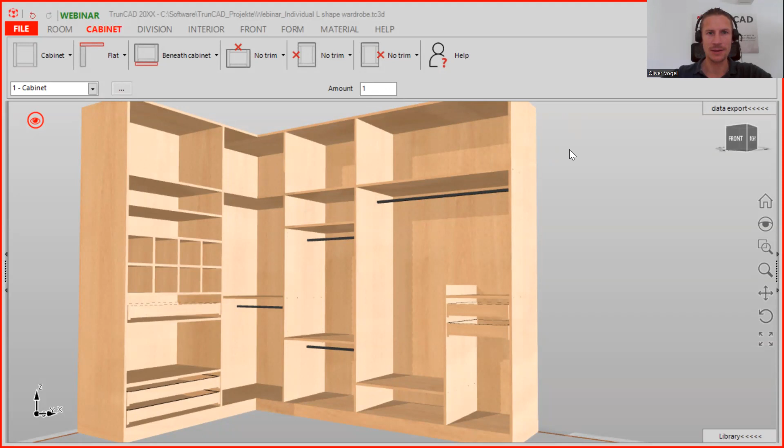Today you're going to see how to plan in TrunCAD an L-shaped wardrobe like this. You will see how to make the division, how to shorten a panel. Step by step we will go through it, and when there are any questions, just let me know in the chat. I will always keep an eye on it.

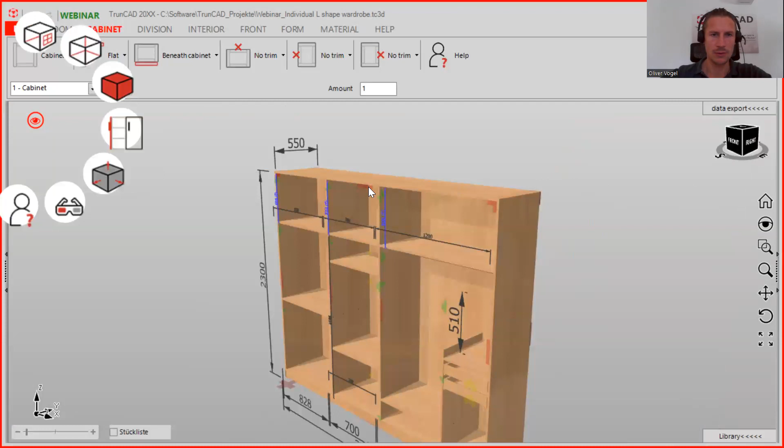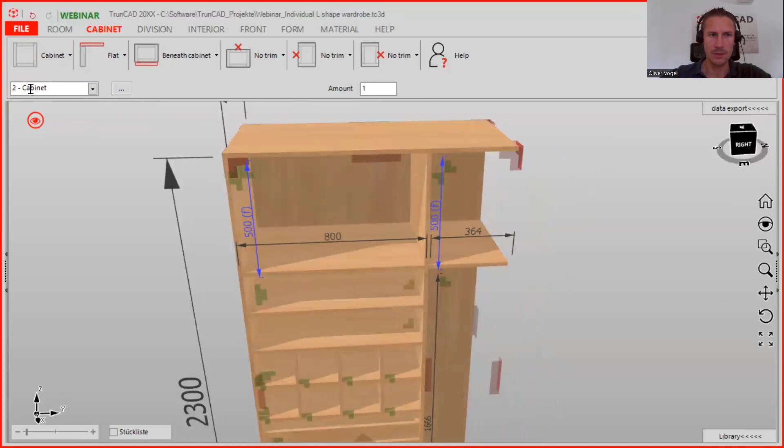And then let's start. First of all, we click here on a red eye and we activate the smart clicks. You see this L-shaped wardrobe has two cabinets. We can here also draw the room, and we can turn everything off except the activated cabinet. That is our first one, and here that is our second one. I will also show you how to set up the second cabinet so that it's perfectly fitting into the first one here.

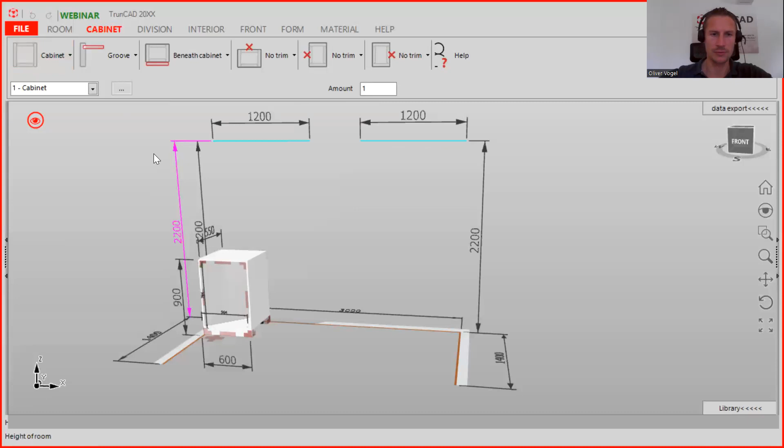All right, then let's start, and we click here on the File tab and start a new project. So first of all, it's important to make sure the room size is correct. Later on we are also able to change it. Here's the left wall, we don't mind it in this case. You see here I have a different default cabinet, so we can turn off the plinth legs, and here we want to have for the plinths also the back left and right part of it.

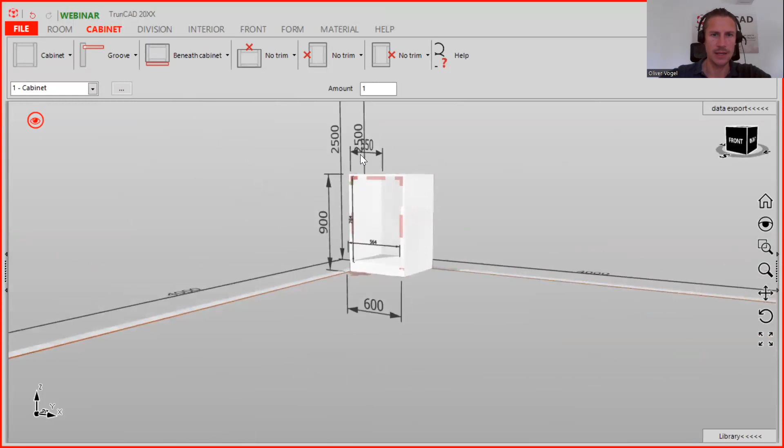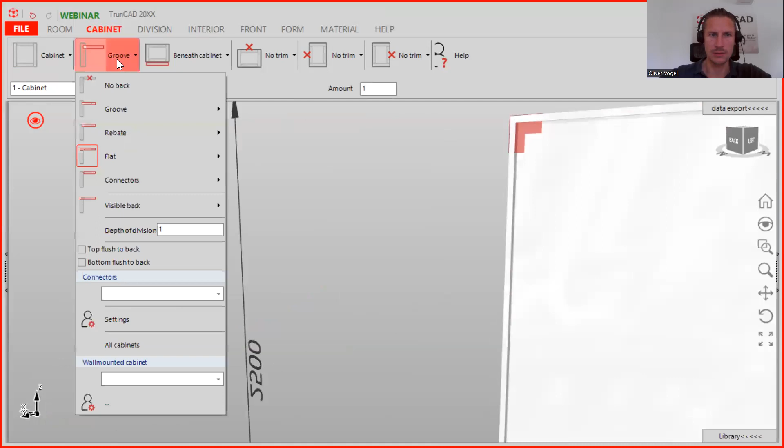Then it's already appeared, and then we start with measurements. The depth is all right. The height of the cabinet is 2300 millimeter, and the width of it is 2800 millimeter. So the back is not grooved, it's flat. And here you can also change the distance to the side. You can change it individually. So then we have it like this.

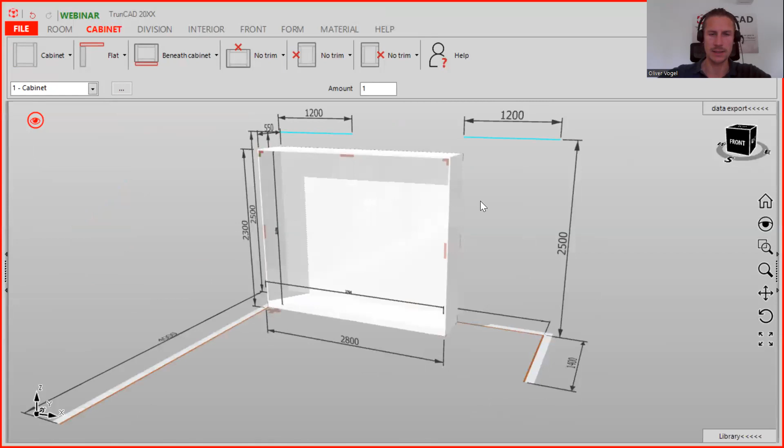And here in this case, at the beginning, I recommend to change here also the material. I activate here all parts of the group. The verticals and horizontals is the group part, the back is one, and you see here also for the plinths, it's also a group. Then the material is also fine.

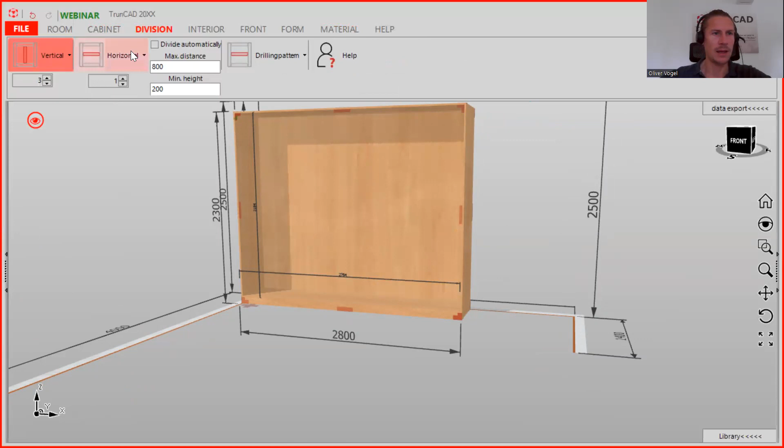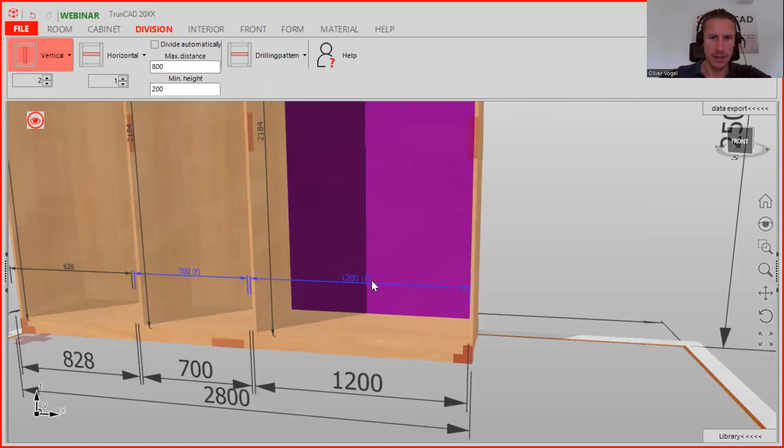All right, so then when this is done, in this case we don't have a trim on top or on the sides. We can click on the division tab and set two verticals. We drag it and drop it in here, and here the right side should have a width of 1200 millimeter, and the middle one has a width of 700 millimeter. You see when it's blue with an F, it means that the measurement is fixed, and here the left one is flexible.

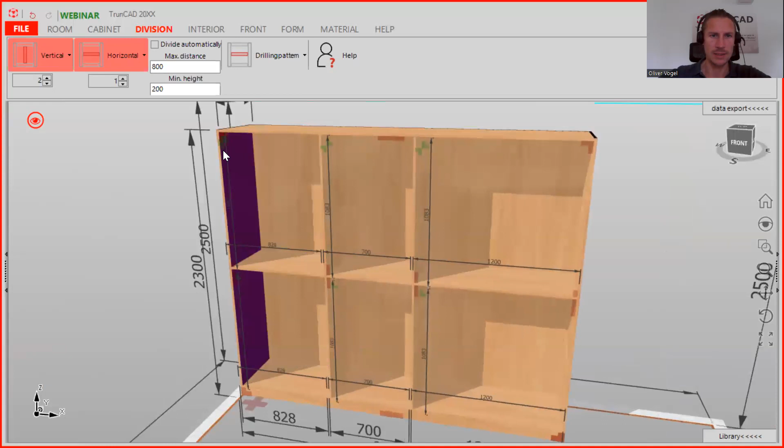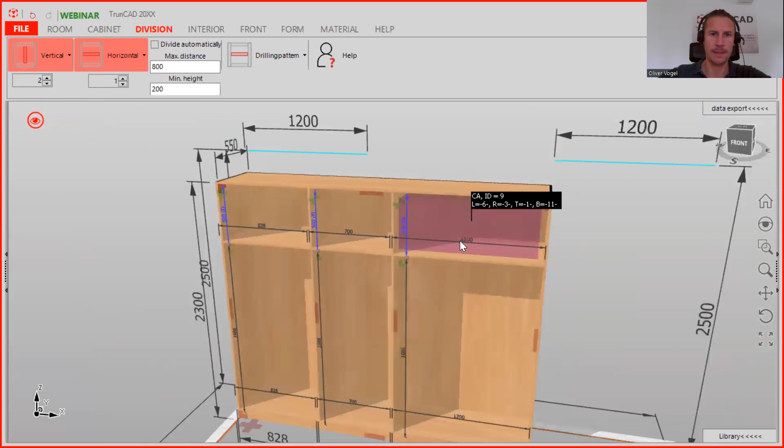So next we want to have a horizontal on the top, and this area has a height of 500 millimeter. We set every area with a height of 500. And then the first step is done. Here on the left side we have one more. In the middle we have two more horizontals. And here on the right side we have one horizontal, but the top area has a height of 200 millimeter. Now we click here and set the height of 200 millimeter, and later on we need this area for the clothes rail, which I show you later on.

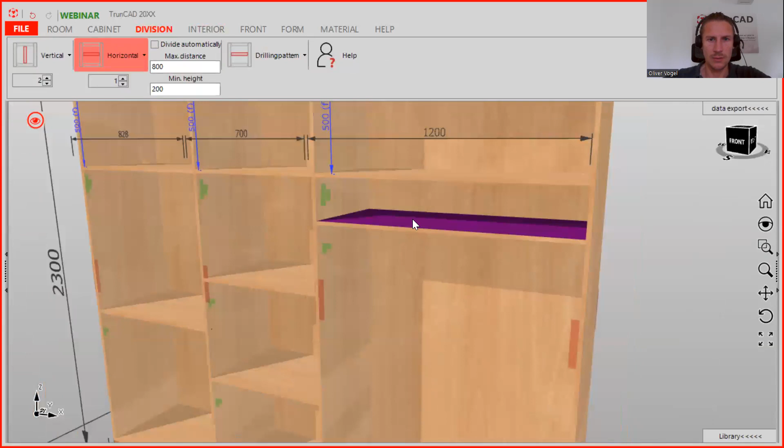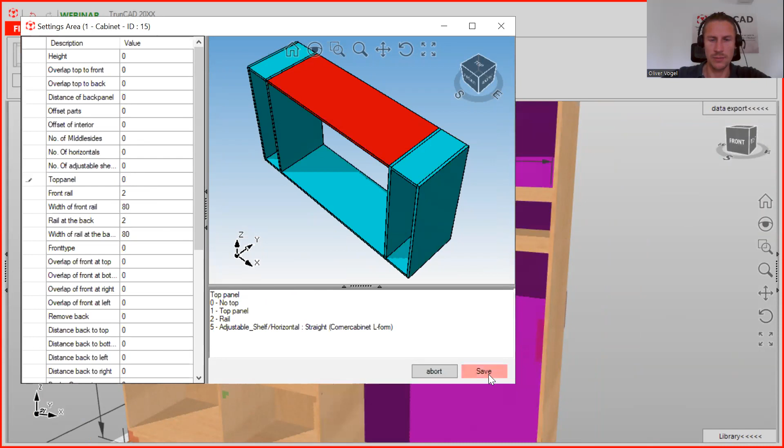We need this area, but we don't need this horizontal. That's why we can click in this area, go into the setting, and here you see the top panel. You can choose, do you want to have the top panel, do you want to have a rail, or when you type in number 0, we don't have a top panel for this area. Here you see it's disappeared, but we still have this area, which we need later on. Okay, then we can continue.

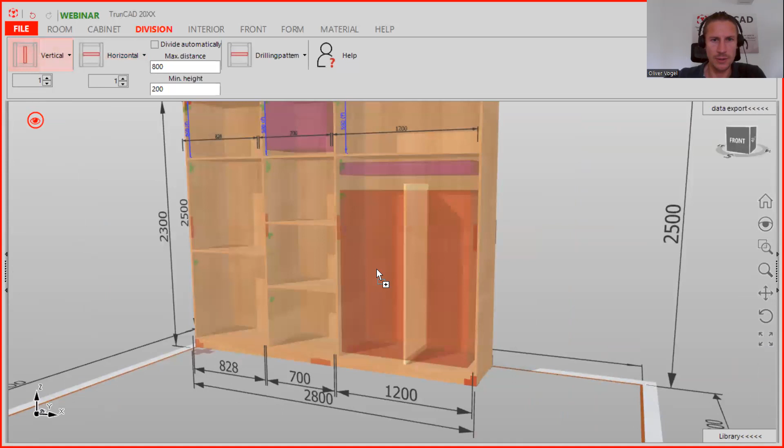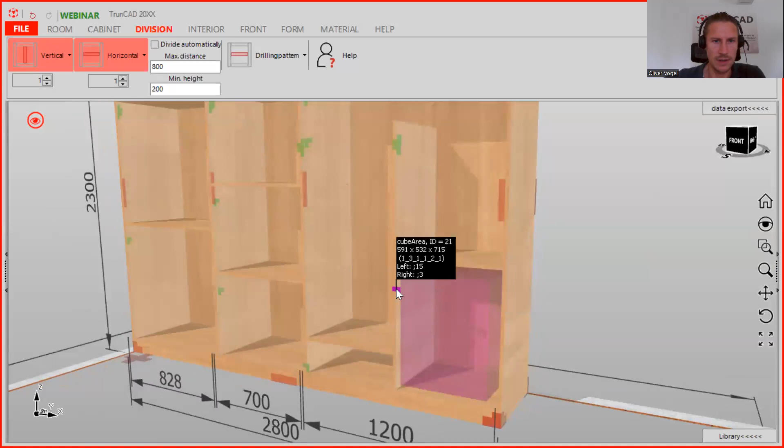Here in the bottom area, on the right side, we want to have one vertical. You see the vertical is going to the top of this area, and then it's stopped. Later on we will also shorten this part. And here on the right side, as well as on the left side, we have two more horizontals, and this area also has a height of 200. Height of area is 200 mil. And the height of the right area is 850 mil.

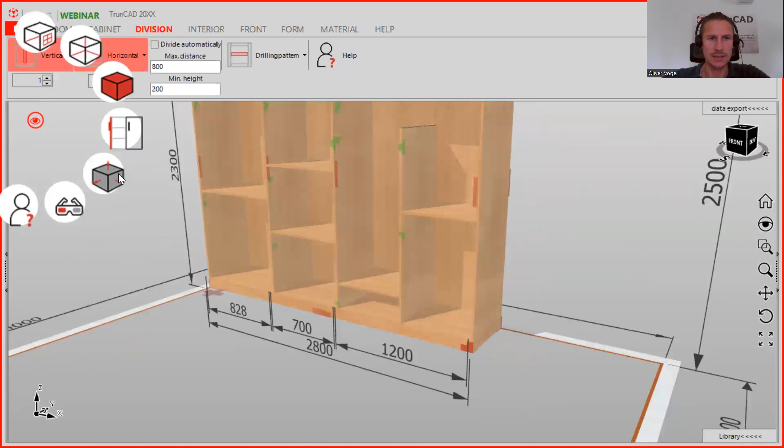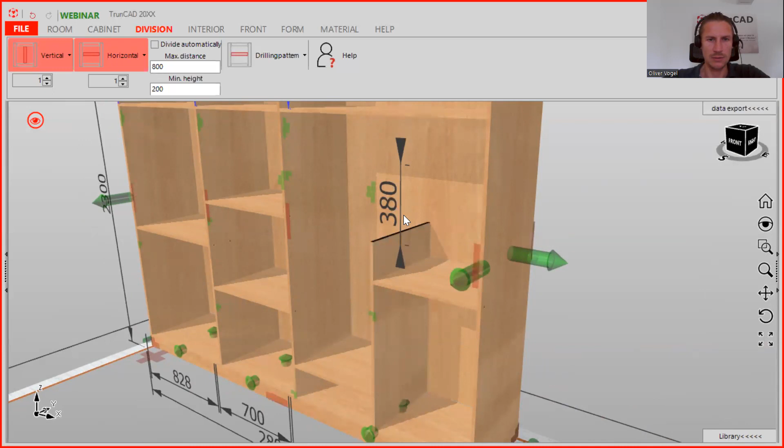Now we want to shorten this, and therefore we need to activate the arrows. That is a case where we need the arrows. We press and hold the shift button, then we click on this part, and then you can shorten it. You see a new dimension opens, and we can click on it and type in minus 510 millimeter. And then we have here an overlap, which we want to have. All right, I think that is pretty easy when you know how to do this. When there are questions, just let me know, and we can continue for now.

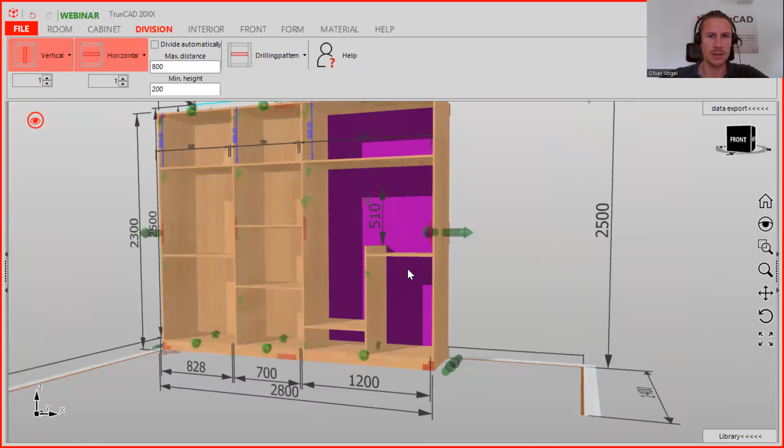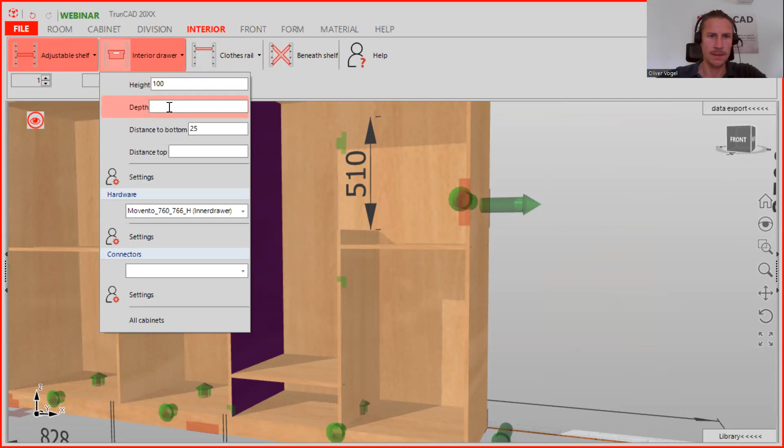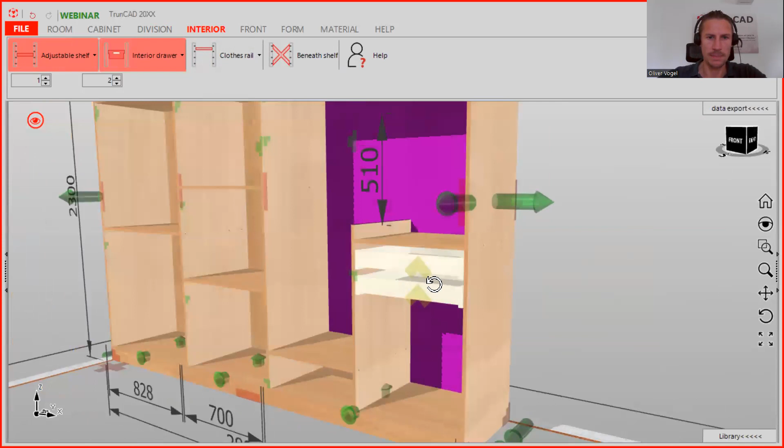So here on the right side we want to have two interior drawers. That's why we click on interior, choose 2, and set up the interior drawers. The height should be 100. The depth we can keep empty. The distance to the bottom is 25. And here you can also choose your hardware. Then you just drag it and drop it in the area to set it up. We can now also change the material for the drawers. We click on the material tab, and we want the same here. We just drag it and drop it over the front.

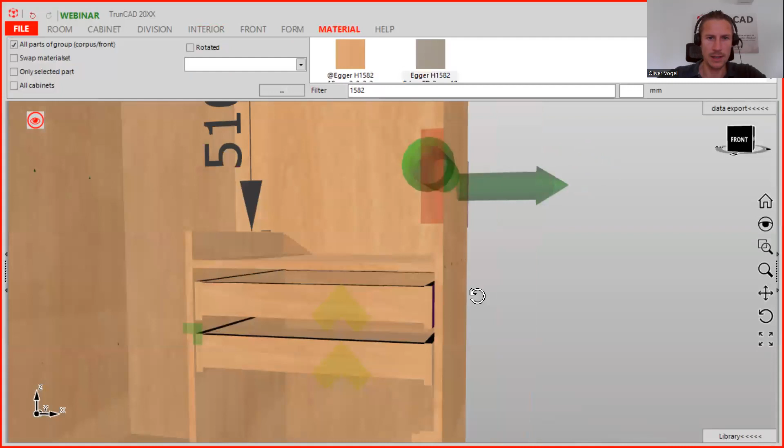Yeah, and also for the bottom. And then you see it's adapted. So you see here, I have two materials, one with an edge banding all around, and then one material with an edge banding on the front and back. You see here it's black, that means there's no edge banding, and we can choose here also the one which is going around. All right.

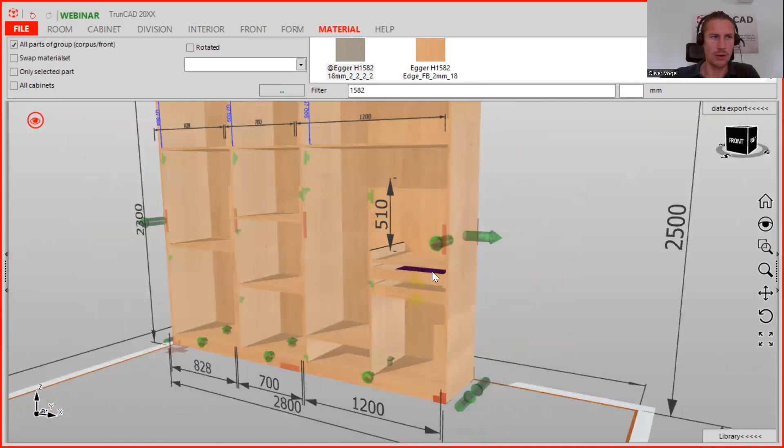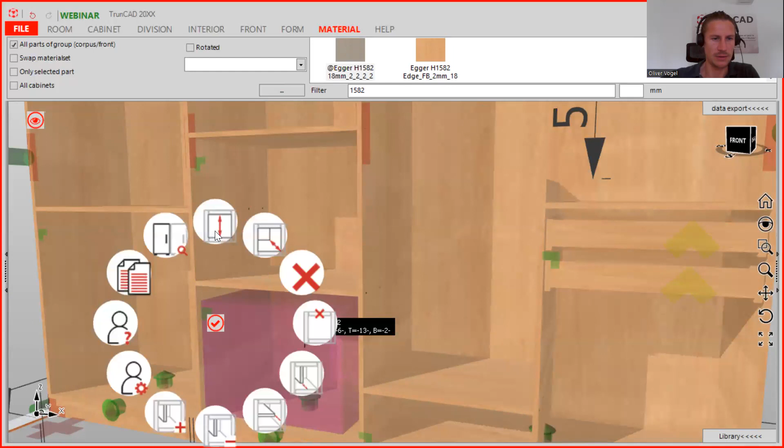So then we are almost done with this. We need to set up this area. This should have a height of 500, and the top area should have a height of 250 mil.

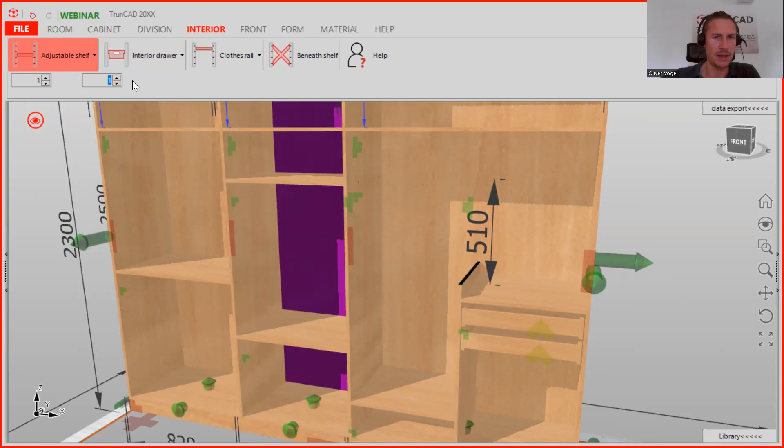All right, and now we need to have 3 clothes rails. That's why we click back to the interior tab, and we click on the drop-down menu for the clothes rails, and here it's distance top. That's our hardware. Now you can choose, are they top fixed or side fixed, and here we type in how many we want to have, and then you just drag and drop it in the area where you want the clothes rail. In this case we want to have it here and here on the bottom area.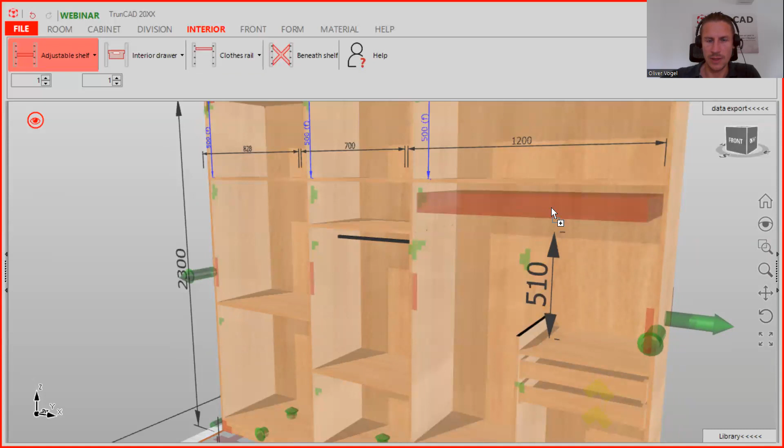And now you see why we need this area, because the clothes rail should go over the whole area, and it's only working when there is no vertical in the middle. That's why we put this on top. If we didn't, we could set it on the right side and on the left side, but because of this area we can set the clothes rail through the whole area. And we don't need the horizontal here. That's why we removed it.

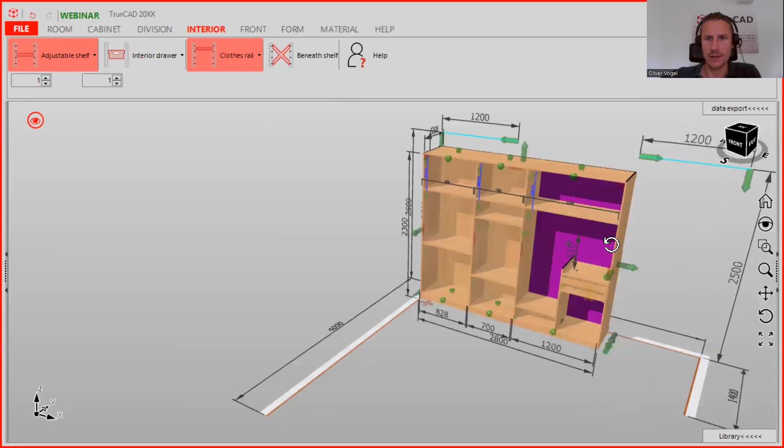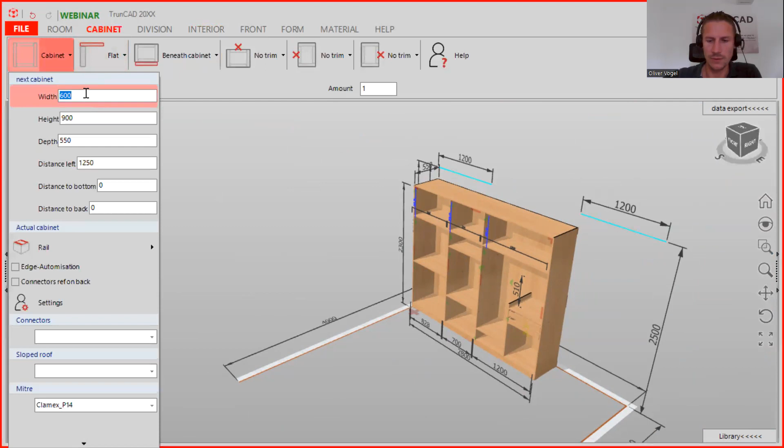All right, now we are done with the first cabinet. So we can now deactivate the arrows, and then we set up the next cabinet. For the next cabinet, we click on the cabinet tab, and here we type in the width. First we type 1200, and later on we can change it again, and the height is 2300, the depth is the same, distance left we can keep like this, and we drag and drop it with the mouse arrow on the left wall.

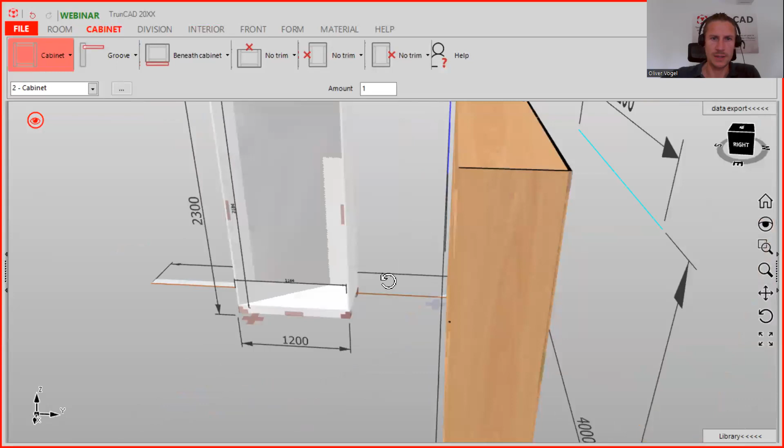Here it's also important, I zoom a bit in, that you are exactly with the mouse arrow on the wall. It doesn't matter if you are on the front or more on the back. It's important that you are on it, and then you see the cabinet get the position.

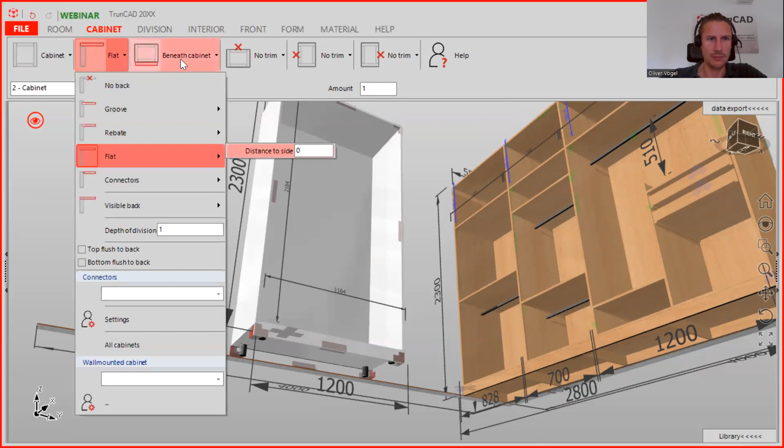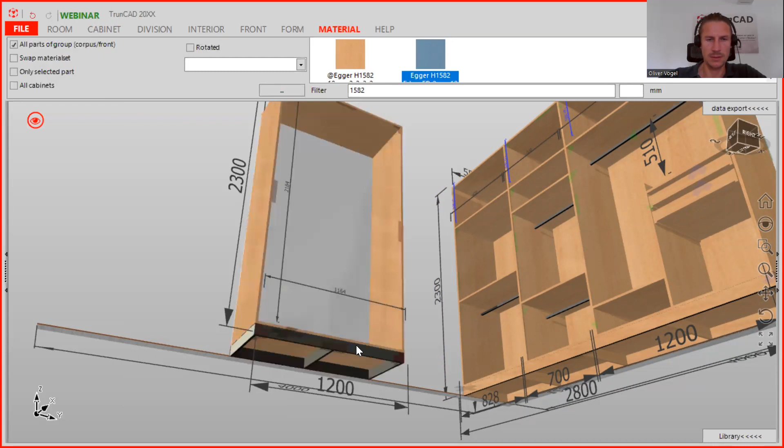So now we need to change the back to flat again. Now you can set it to 0, and we don't want the plinth legs, and we activate all parts for the plinth, the back, the left and the right, and we go back to the material tab and change the materials.

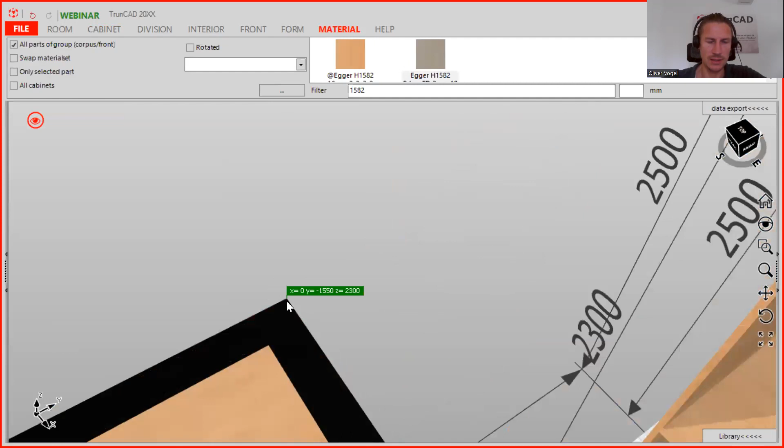So now we need to know the distance of this gap. Therefore we zoom a bit in, keep the control button pressed, go to this edge and click on it. Then it's a green flag. And here we also measure it, and we see we have a distance of 1000 millimeters. So now we click on OK.

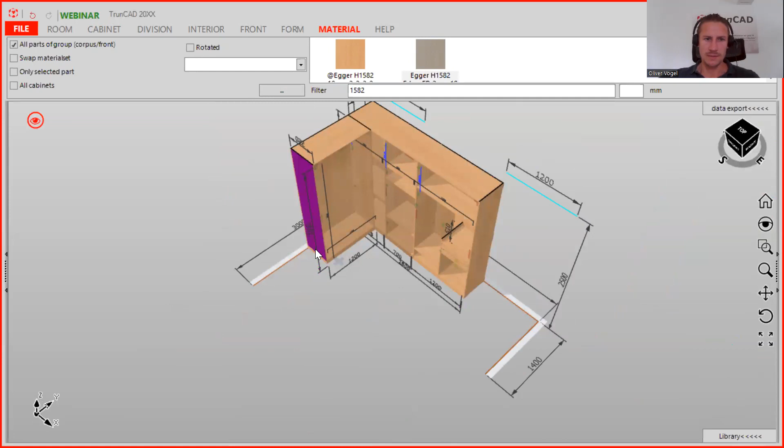So we have now two options. We can click here and change the distance to the left from 1250 to 2250, or we can change the wall of the room afterwards. Instead of 4000 mil, you can type in 3000 mil, confirming with enter. And because the cabinet is fixed on the left wall and the room is getting smaller, you see we are now close to it. All right.

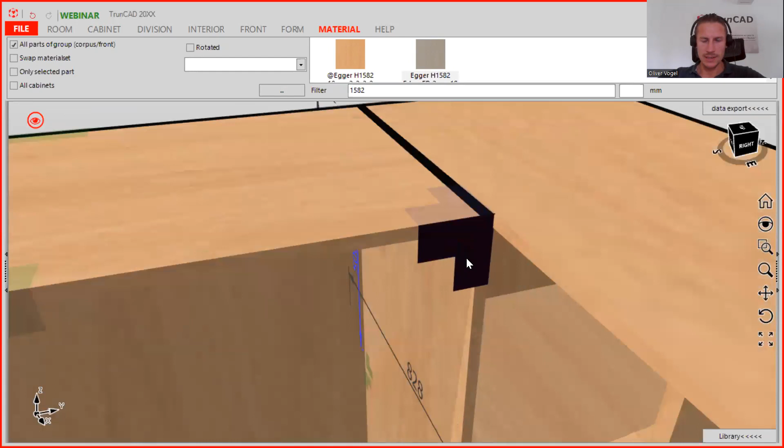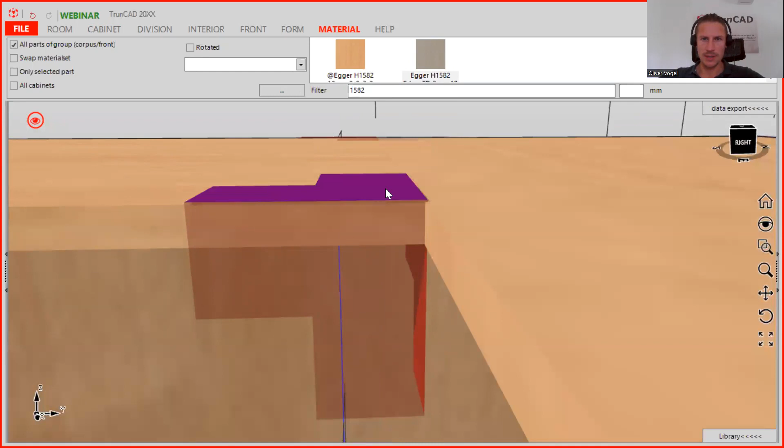So now we don't want the right side. That's why we click here, and we can delete the right side. So what you see now, we have a gap. You can now click here and say horizontal passing. Then we can close the gap easily. I will set it to back side passing. In a couple of minutes, I'll show you why.

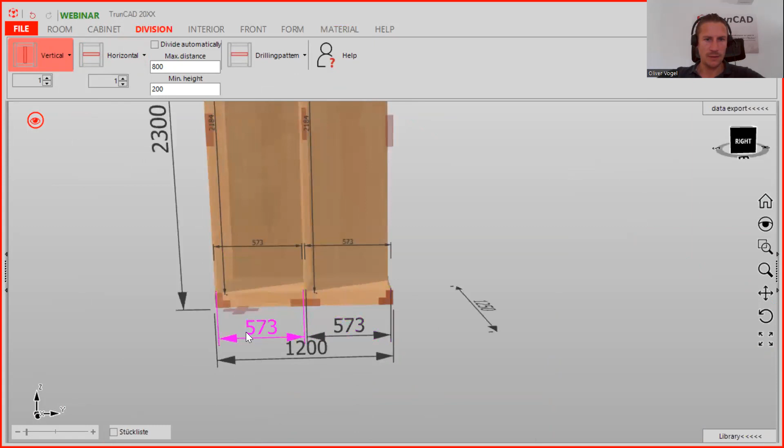Because now we are starting with the division of the second cabinet, and here we click on the red eye, hide the room, and we only make this cabinet visible. And now we go to the division tab and we set one vertical in here, and the left side should have a width of 800.

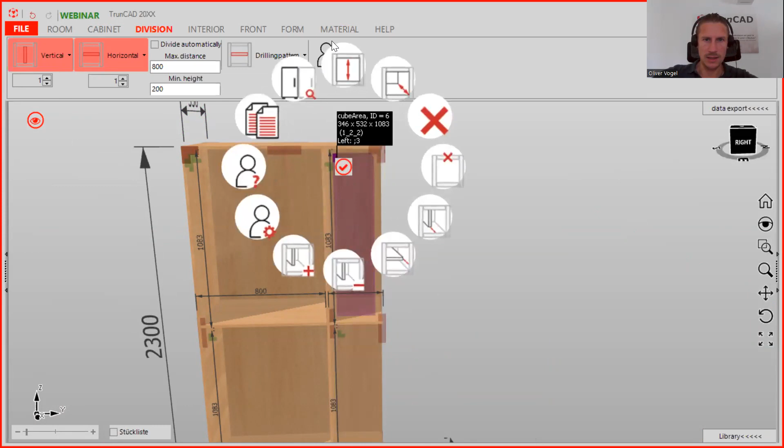So, as with the first cabinet, on the second cabinet we also have a horizontal on top in every area, and the area has a height of 500. The left as well as the right one.

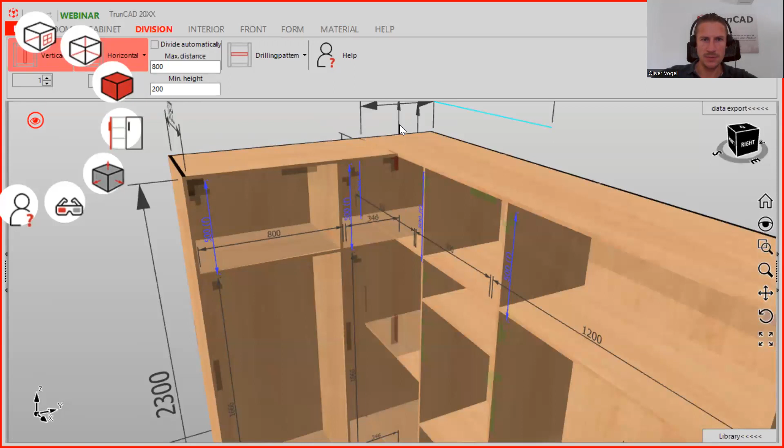So now I will make the whole cabinet visible. You see here we have the gap on top, in the middle, as well as on the bottom. So the back is all right, because we also have a flat back here, which has the same thickness as the side on the left.

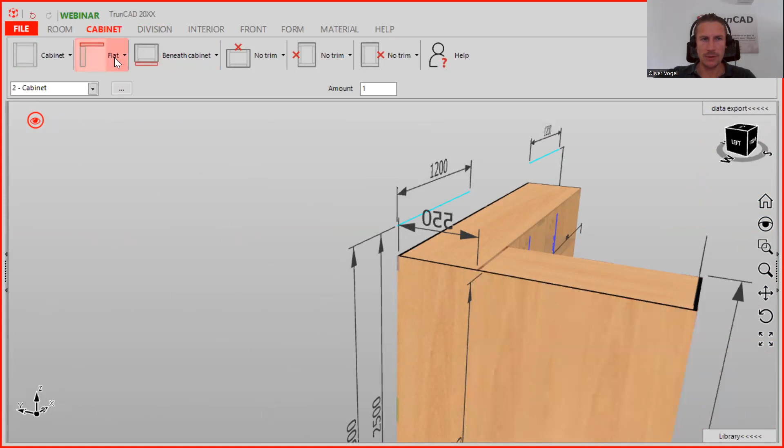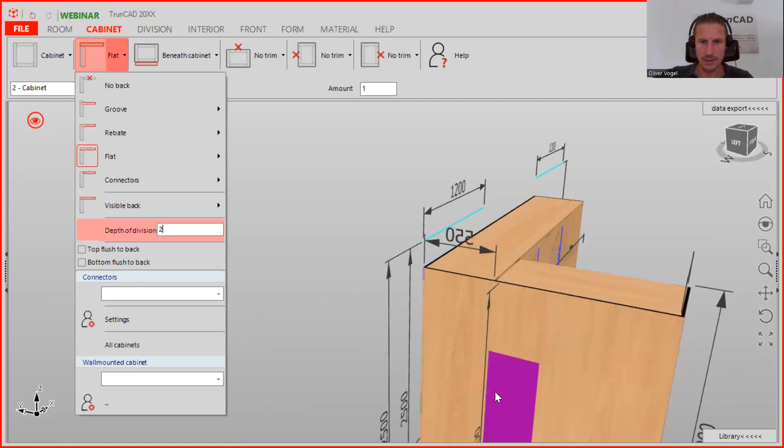So what we need to do now: you see we have two parts of the back. We click on the cabinet tab, and we want to have one part. That's why we go to back options, where we have flat, and when we set depth of division to 0, it becomes 1. When we type in 2, we get 4 pieces, because we have 4 areas, and with every horizontal or vertical divider it also gets disconnected. When we type in 1, we have left and right, and when we type in 0, it goes through.

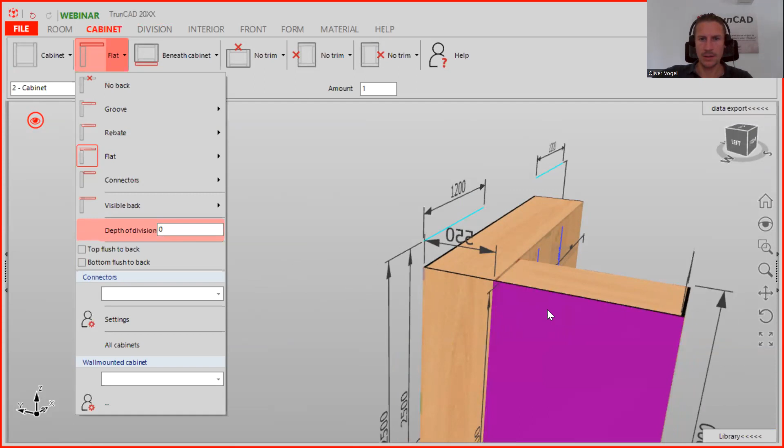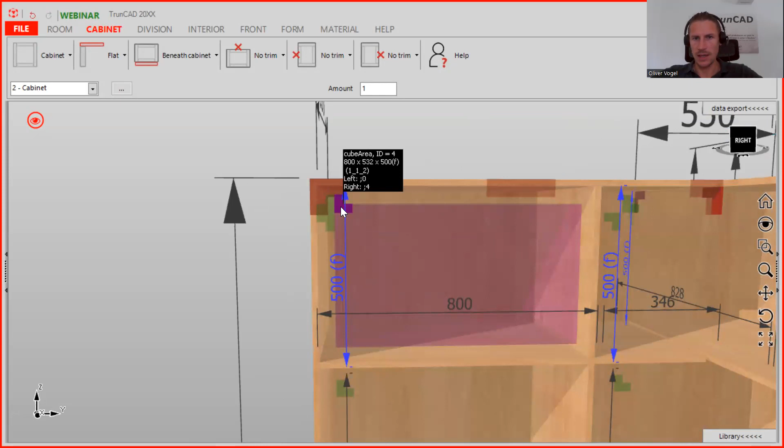And here we also need a gap of 18 mil. That's why we click on the tab for the whole area. You need to make sure you have the right one. That is the area for the top left corner, that is the area for the right corner, and the purple-colored one is the area for the whole cabinet. We click on it, go to the settings, then distance back to right, set 18 mil, and save it. You see now we have 18 mil here too.

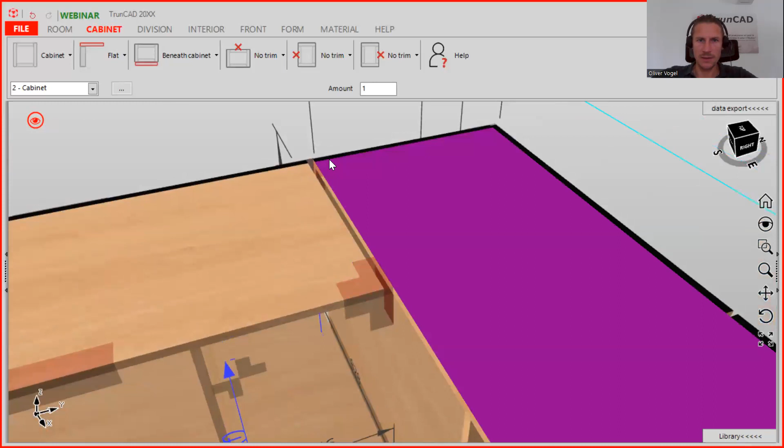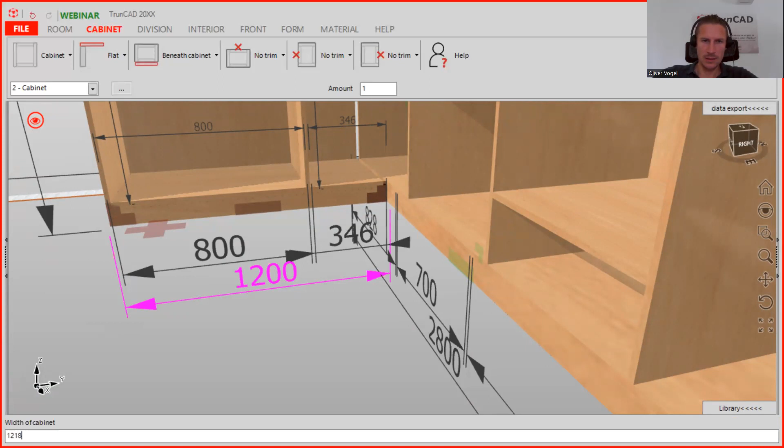And now we just extend the whole cabinet by 18 mil, then it fits on top, in the middle, at the bottom, and on the back as well. This 800 is still fixed, and this measurement here is flexible. We type 1218, confirm with enter. Now you see the 18 is added, and it fits perfectly to the first cabinet.

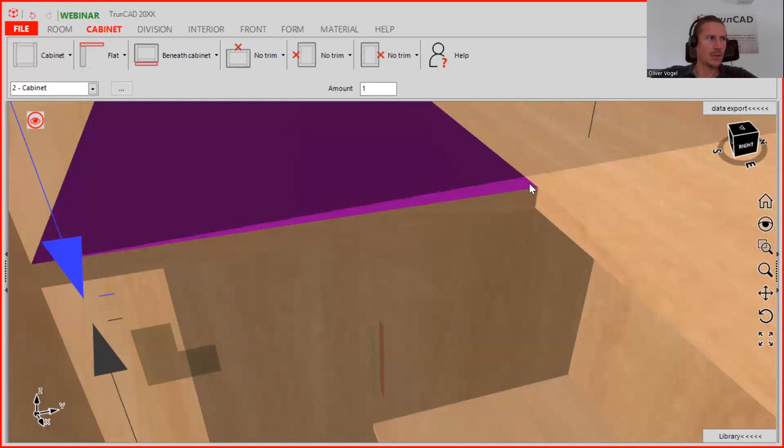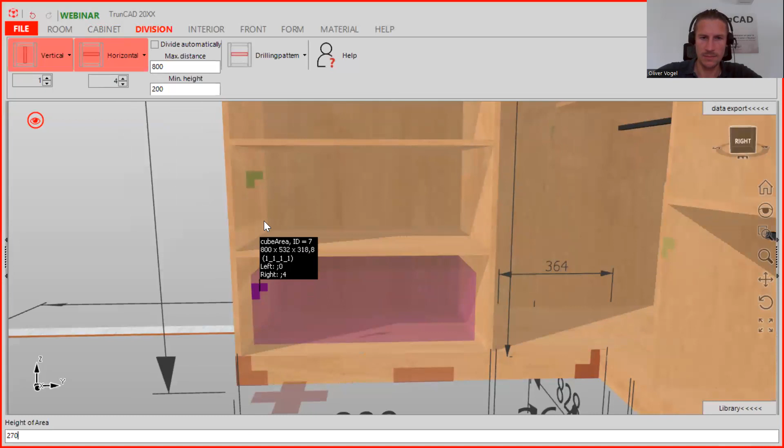So, all right. Then we can continue with the left side. The right side is done, and we are focusing on the left side. Here we also have a good division. We have 1, 2, 3, 4 horizontals. Type in number 4, drag and drop it in here. The bottom one has a height of 270. Type in 270. This one has a height of 180.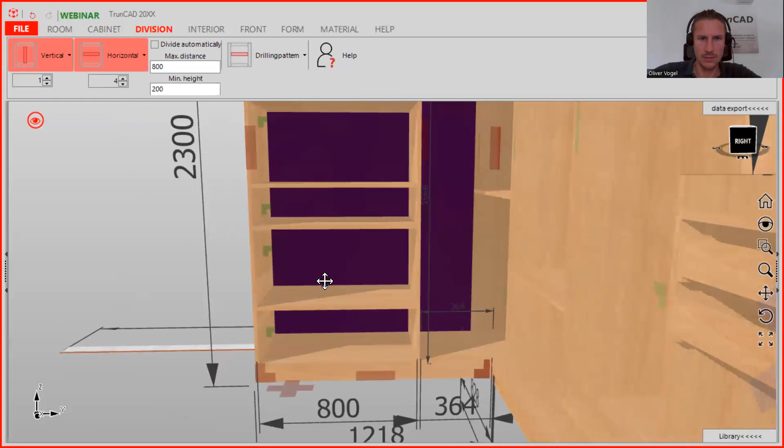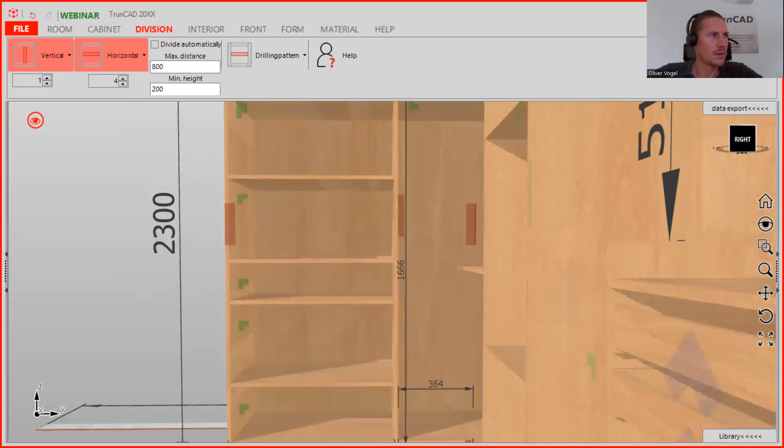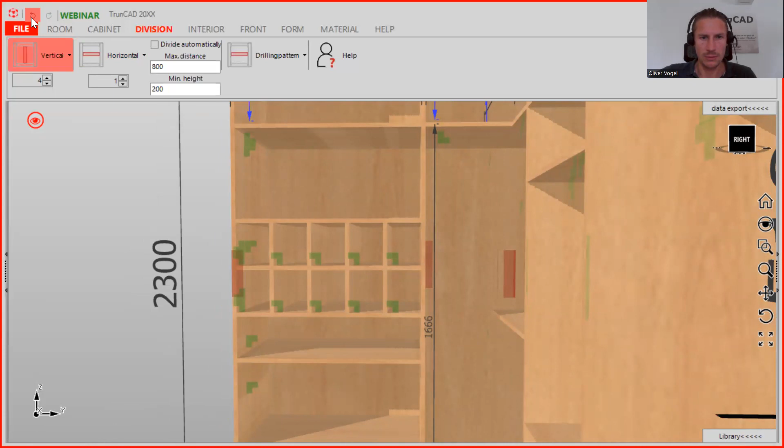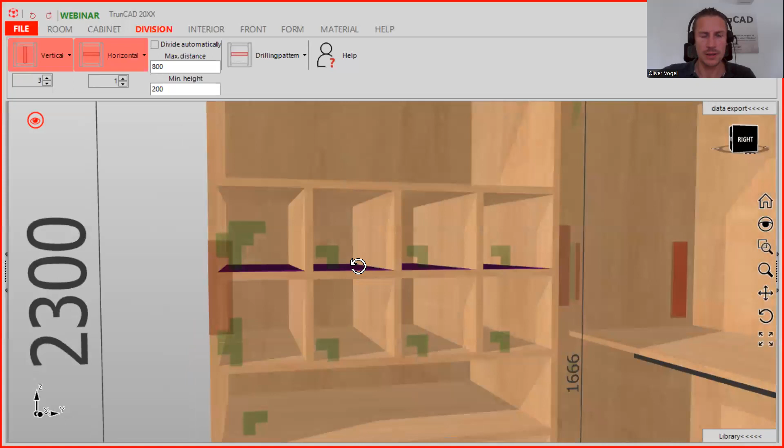And now I check if I'm right. Yes, it is all right. In this middle we have one more horizontal, and then we have 4 verticals. You see when we go on a divider, it automatically goes through the whole area. No, I wanted to have 4 areas, so we need 3 verticals here. Yes, here we are, 3 verticals, and that's right.

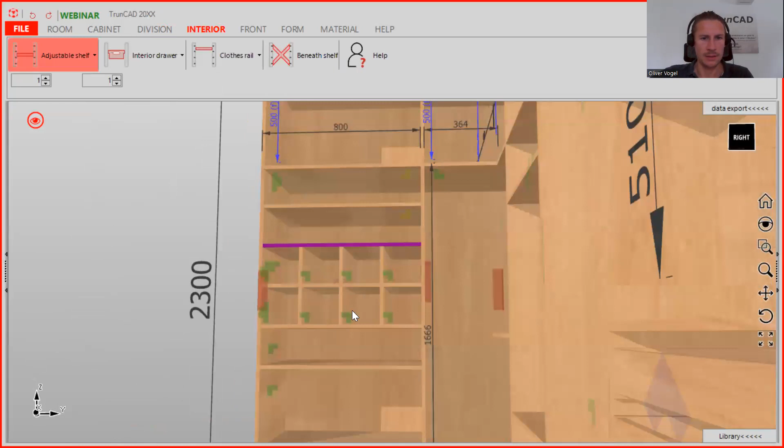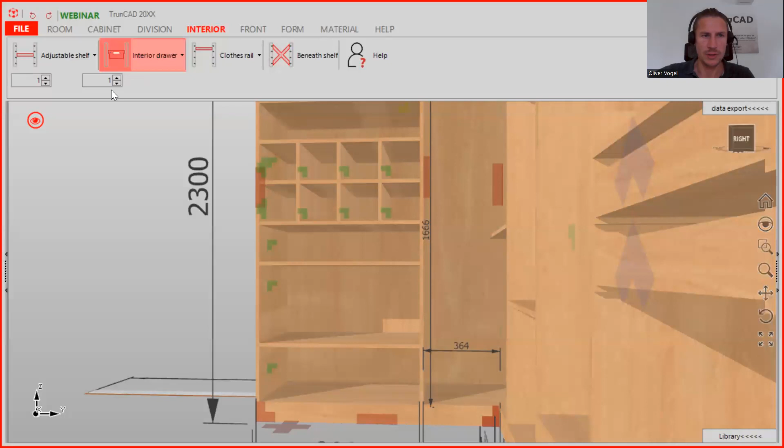All right, now we go to the interior tab. On the top we want an adjustable shelf, here we want an interior drawer, and on the bottom we want 2 interior drawers. So we check the interior drawers, change the distance bottom to 20 mil, set 2, and drag and drop the 2 in here. That is fine. And here we want 1, and we drag and drop it in here too.

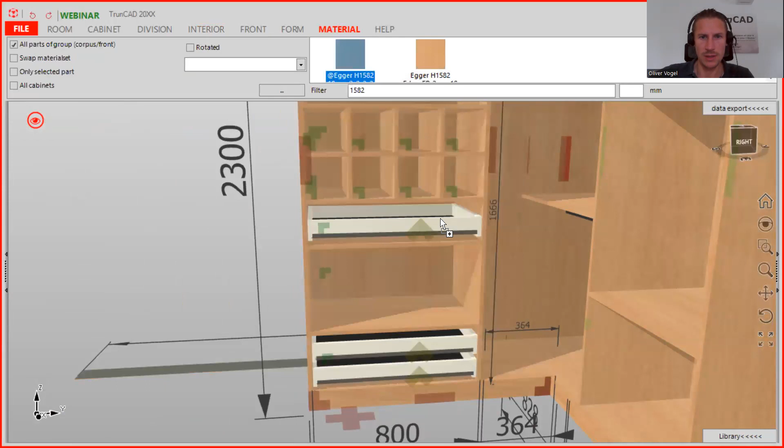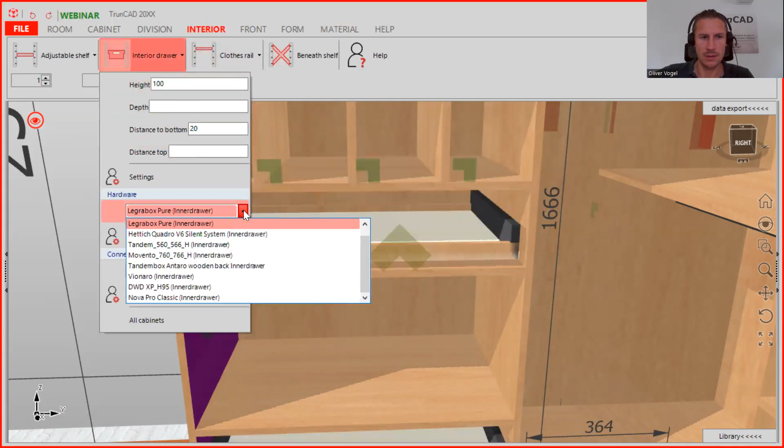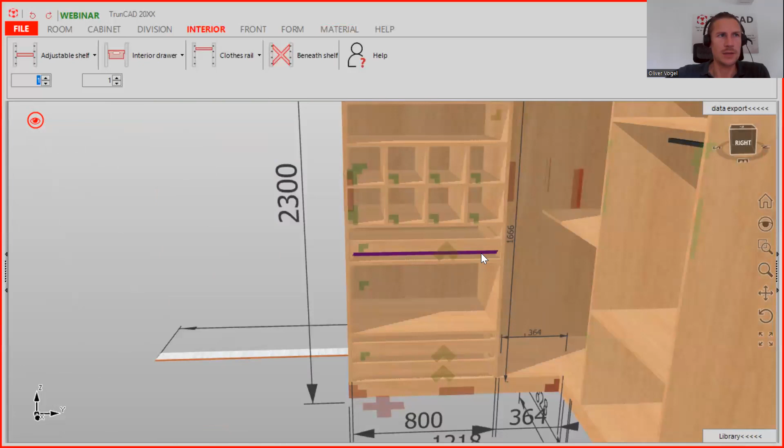Now we click on the material tab again and change the material. When you click on the interior tab, you can also change the hardware afterwards. You see, it's also changed. We keep the Movento. All right, that's it so far, now we are done. Now we can click on the red eye and turn off the smart links and the dimensions, and we can present our project to our customer.

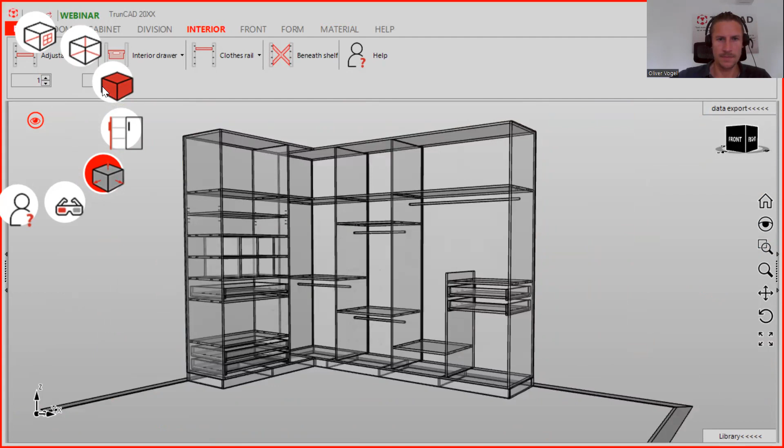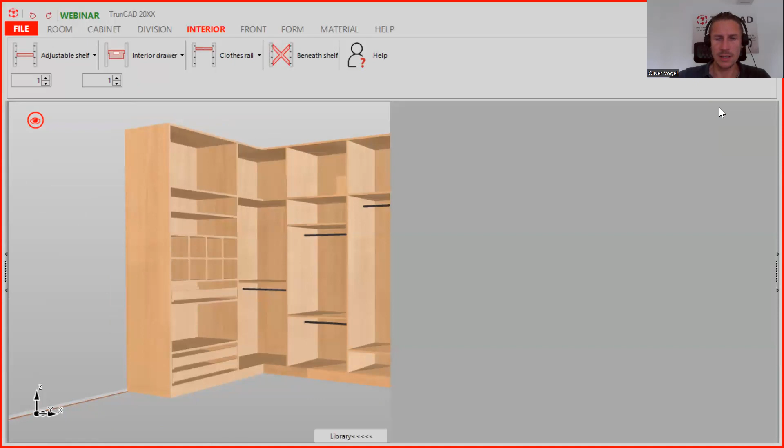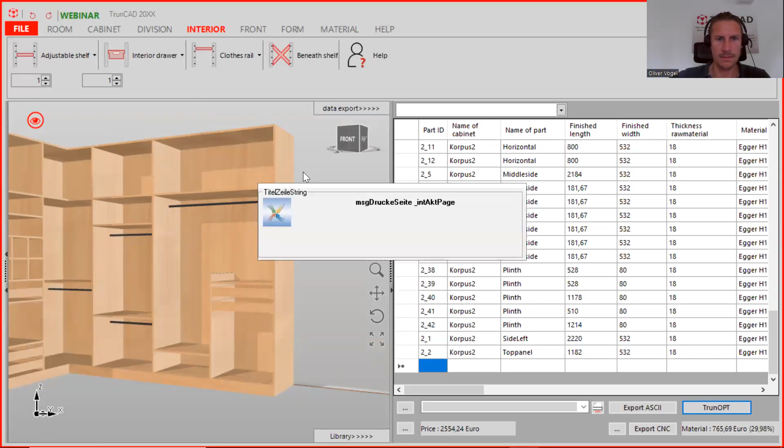If you want, you can click on the red cube and choose different rendered views. Then when your customer bought your project, you only click on data export, and here you can get your cutting list. When you click on TrunOPT, you also get the panel optimization. It's a bit bigger project, so it takes a bit to calculate. And here you see the sheets, how to cut them in the best way.

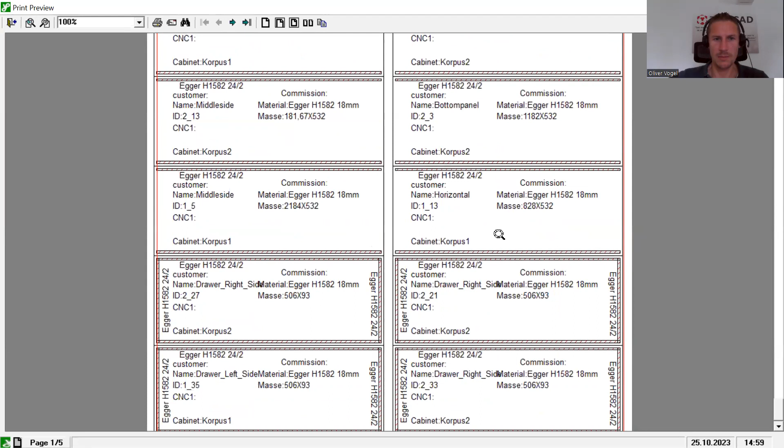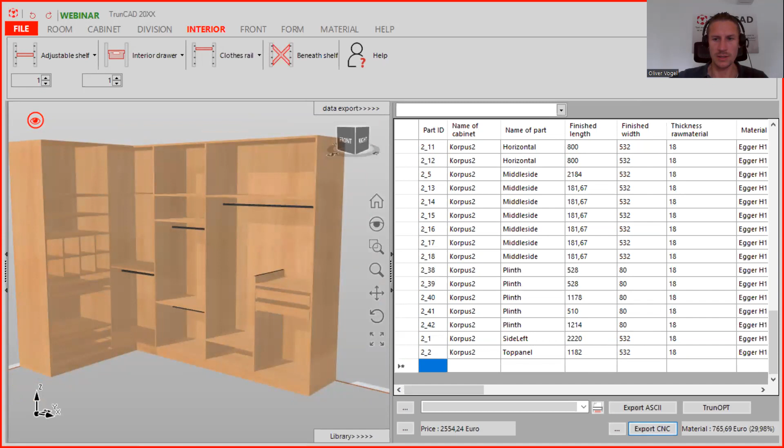When it's important to you, you can also print the labels. You can configure your own labels, also with a barcode; here I don't have a barcode activated. When you want CNC files, like for Holzher in Hops, you click Export CNC. You see the parts are being calculated. And here you see the Hops files, which you can import in NC-Hops or in CAMPUS, because Biesse also uses Hops. We also have data export for other machines and software.